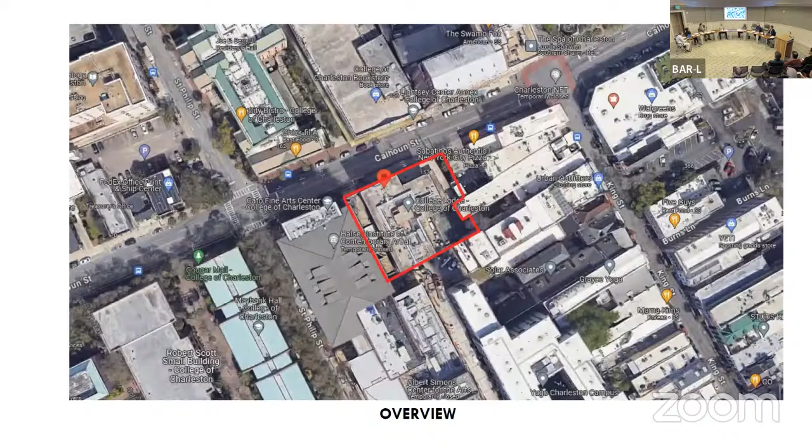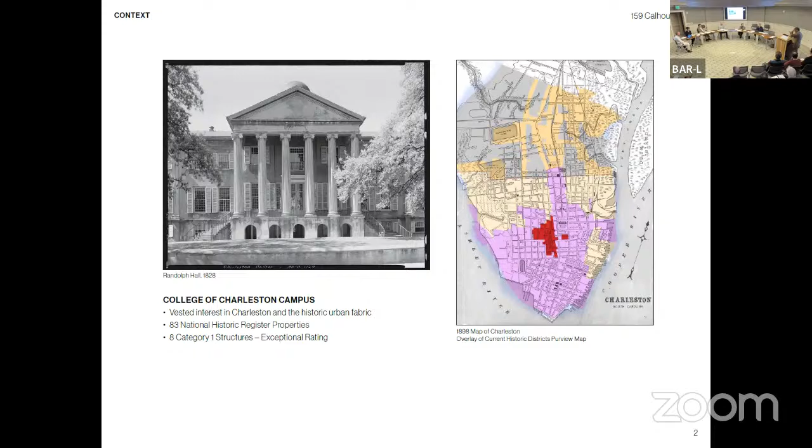My comments on today's presentation are going to run along two paths to try and structure this. First, I want to talk to y'all about the merits of the application as they relate to what is put in municipal code, prior decisions of this board, and the design principles adopted in the city's preservation plan. Then the second path, toward the end of the presentation, are the real and serious limitations of the existing structure at 159 Calhoun. Pages 3 and 4 of your packet begin to show the context and the merits of this building and why we feel we are appropriate in asking for this.

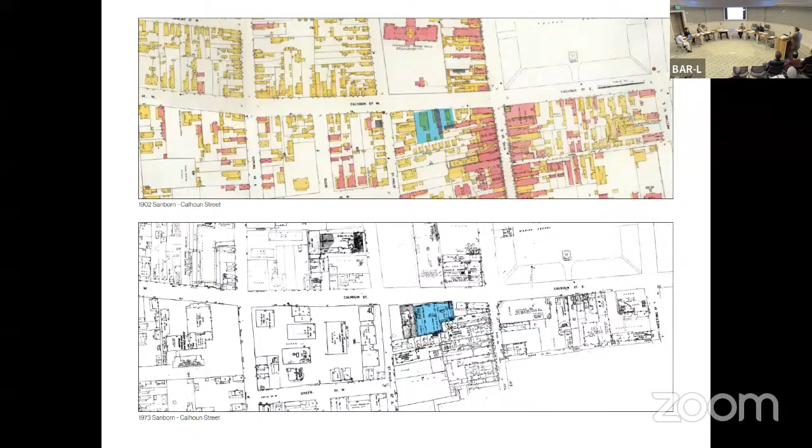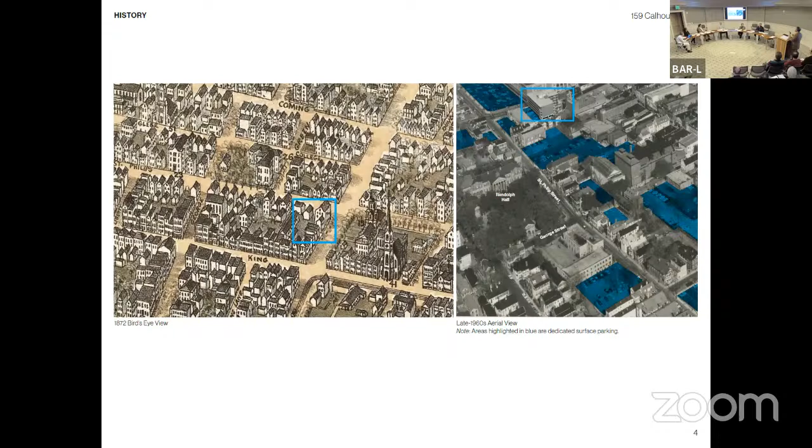I don't need to recite the language from municipal code, but as I read it, the idea is that when considering a request for demolition, the BAR should consider components like historical and architectural merit, uniqueness, is the building Charleston, conformity to the neighborhood, does the building fit in its neighborhood, is it part of its surroundings, and cultural significance—does the building represent something larger than just the building?

As you'll see on page 5, we think one of these pictures answers all of those questions yes, and one answers those questions no. The image on the left is something we view as befitting the ideals and character of Charleston. It likely should have been preserved at the time.

The image on the right, we would argue, does not have relevance to Charleston. It does not meet the stated principles of what can and cannot be demolished in the city. In our view, these images are a stark reminder of a somewhat unfortunate chapter of Charleston in which we lost architectural treasures and replaced them with buildings that have virtually no identity.

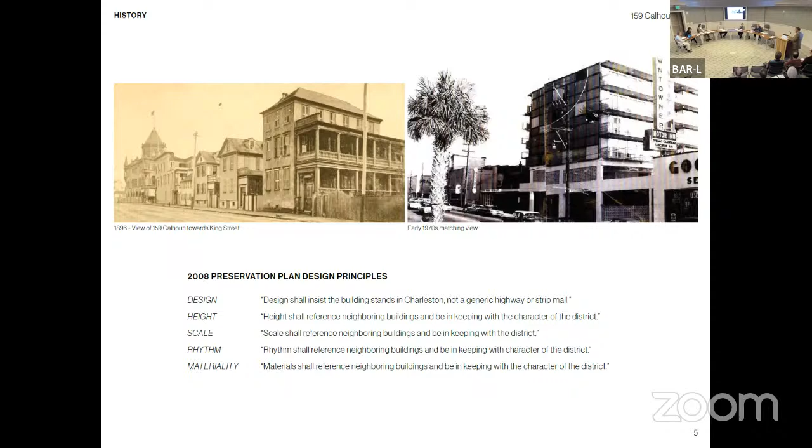Page 6 begins to show examples of virtually the same Downtowner Motor Inn in locations all across the country. The simple fact is the Downtowner was not designed or built to contribute to the rich architectural history or urban fabric of Charleston. It was designed in a way that fit Charleston no more or less than it fit Columbia, Missouri, or Amarillo, Texas.

It was built by a corporation to maximize profits. It was a pit stop or layover on the grand American road trip. It did not fit its surroundings when it was built. The building materials were mass produced, void of local craftsmanship. It was the same building built over and over in communities all across the country.

The bottom line is this building does not meet the guidelines provided for the municipal code that govern decisions related to the demolition of structures under the jurisdiction of the BAR.

This is not just our opinion here today. This position was supported by a prior decision of this very BAR in 2003, when the college brought forth an application for demolition of this very same structure. The guidelines then are the same guidelines today. The only thing different is time, but everything else was the same.

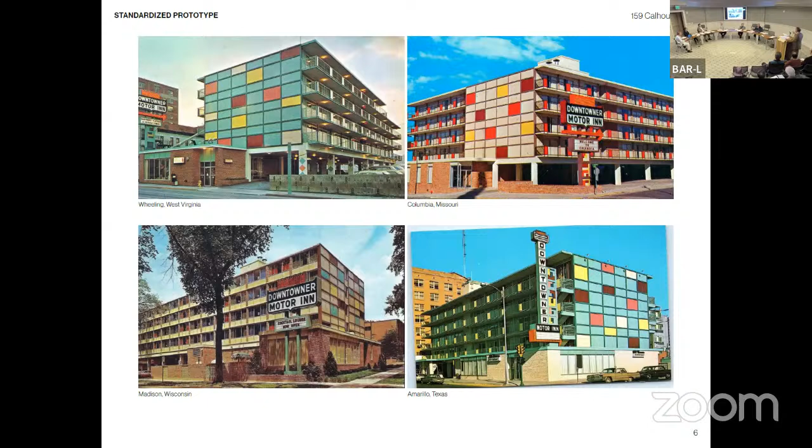Based on all of those factors, we feel our application today very much aligns with the stated guidelines governing this decision. However, if there was any question, I now want to talk about the second track I mentioned at the start of my presentation, dealing with the real and serious limitations of the existing structure. Pages 7 and 8 of your packet show the structure as it is today.

I know several of you had the opportunity to go out and do a site visit earlier this morning and see the facility for yourself. For that, I appreciate you doing that.

There was some confusion, and I want to make sure the board is aware: the facility is currently offline. I don't know if mothballed is the right word, but it is not an active use. We removed students from it following the spring '23 semester, so this past summer it was taken offline.

We did not feel that the conditions in the building were safe, both structurally and environmentally, to the point that we could continue to house students there. And we certainly had a need for more housing, but we just couldn't convince ourselves that this was an appropriate place to continue to put students.

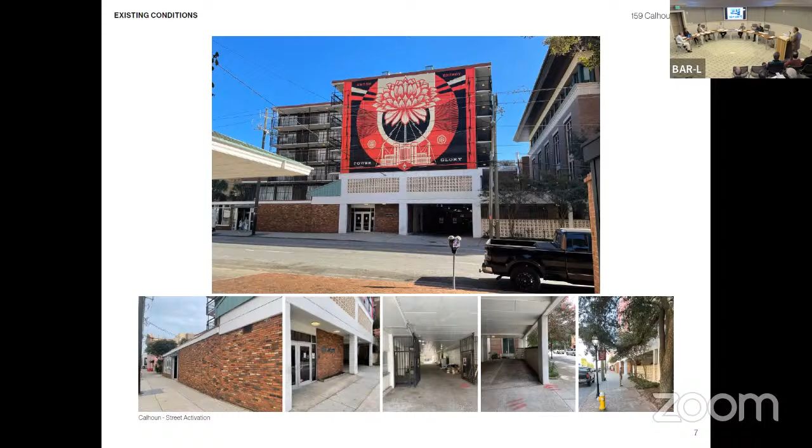Our objective is to bring back online a facility that is functional, that is safe, and that is healthy for the students of the College of Charleston. After years and years of study, I've been with the college for 10 years, and we've been talking about this building since I've been employed there.

We have brought in countless firms. Some firms we've brought in with the stated objective of preserving the building. That was the only reason they were hired. We hired the best firms in the country to do this work, to come in and help us think through an adaptive reuse of this facility. We've spent hundreds of thousands of dollars on that effort, and we've hired multiple firms. One of them's here today that did prior work on this building.

But after years of study, it is clear to us that to save the facility would require such a level of renovation and refit that we would greatly compromise the very thing that we're trying to save. The plain truth is the manner in which the structure was built in the 1960s does not lend itself to a renovation today with modern codes, technology, and equipment, and to meet the demands of students.

Obviously, those of y'all that have been in the building, it has major complications with floor to ceiling heights, the existing complications of the 7-foot ceilings, and how to fit modern and environmentally responsible MEP equipment into the existing framework were made much worse by the significant seismic upgrades that are required on the facility.

We were going through our study on this when the collapse in South Florida happened, which kind of made everybody do a new set of calculus on how do you think about buildings, how do you think about these concrete structures, what is safe, what is not. And so that was, while we were trying to march on this path, it was a major rock in the road and very much diverted how we think about these things.

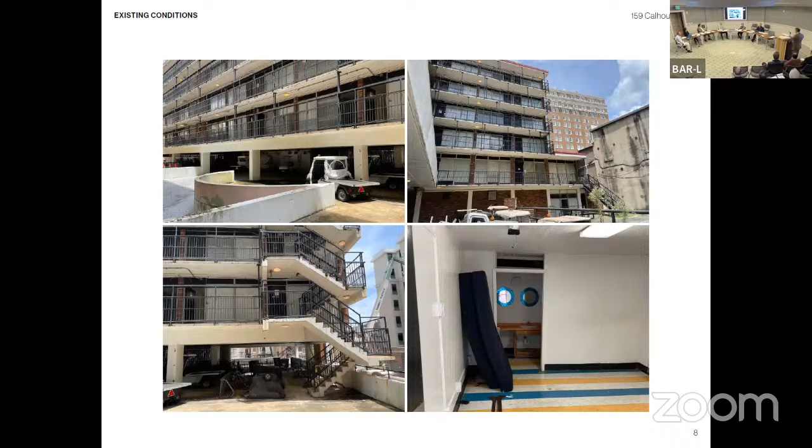The safety of our students, faculty, and staff is and always will be our first priority at the College of Charleston. Page 9 begins to show how any reuse would require essentially rebuilding the building from the inside out. The modifications consume already limited square footage in the building and make the future use greatly diminished in what we can do with it today.

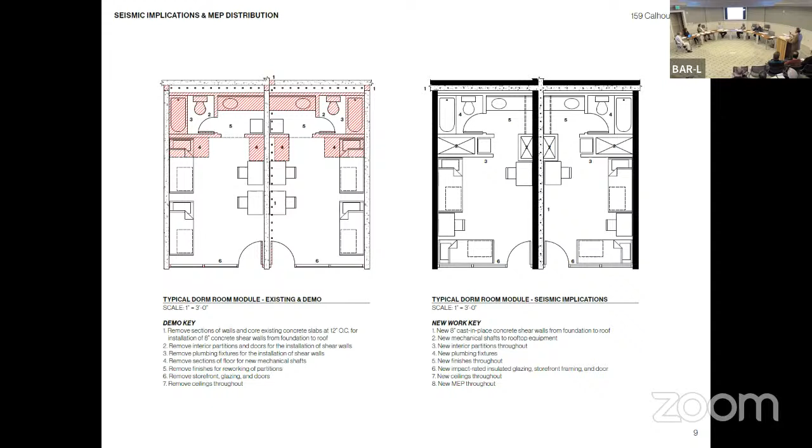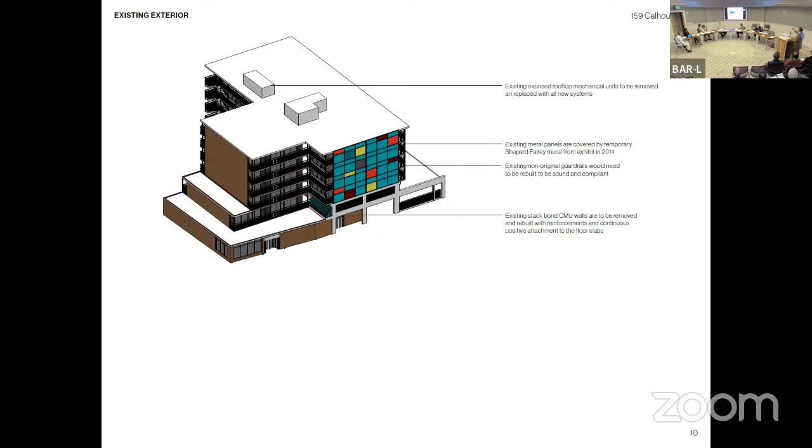As you work through the presentation, starting with slide 10, you begin to see what we've tried to do for you all is model the facility and walk through the various modifications that would be required. So this is the building as it is. And then as you go to slide 11, it will show the seismic upgrades that are required.

If you go to 12, it'll show the MEP upgrades that are required. If you go to 13, it will show the accessibility and egress modifications that will be done. And then finally on slide 14 is the sum total of what is required to be able to try and force the use of this building into the existing structure.

I think we can all agree this is not minimal work. This is a major, major project that begins to make significant changes to many of the things that are trying to be preserved. To achieve a functional, safe, and healthy building, we are effectively rebuilding the entire structure from the inside out. In our view, the merits of the structure, as you think about them within the guidelines established in municipal code, do not raise this building to this level of refit or renovation.

We recognize, and we have pained over this building. We recognize the desires and the calls for preservation. And I would submit 9 out of 10 times when we work on buildings at the College of Charleston, we save the building and continue to use it. But in this case, we cannot get there as an institution. In this case, we find a highly nuanced situation in which the preservation and the ideals of preservation are in tension with building code and the pursuit of a safe and healthy building for the College of Charleston.

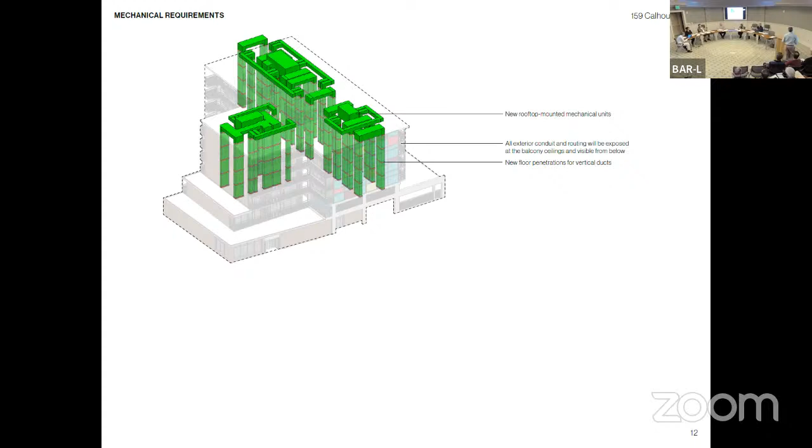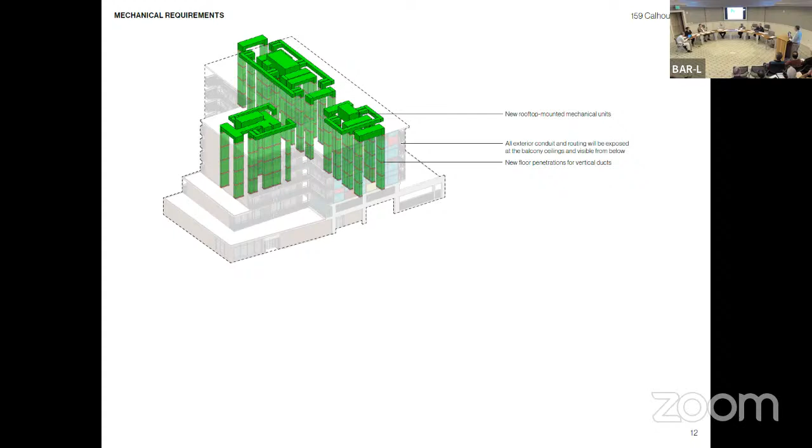So I think I know a little bit about this project, because in 2003 my firm did a major renovation design of this building that included a demolition submittal, done after we submitted our renovation project. Because of costs at that point, it was determined whether they were going to spend that kind of money to renovate the building. There was a requirement at that point from the state engineer to do seismic upfits, and the college decided it might be in their best interest to replace it instead.

We've also done a 2013 study with ADC that looked at many of the seismic issues. We've done life safety repairs to the existing railings you were talking about, some of which were existing, but because of concerns by the college with student safety, due to the openings and sizes of those, we augmented those exterior rails with new steel railing. We replaced existing electrical panels that were known fire hazards.

So I know a lot about this building, doing, I don't know, over the course of 30 years, it feels like a lot of projects. I am here to say that I feel this building has a very, very restrictive context for a renovation. And even if it were to be renovated, by the time you look at what has to be done, mainly for seismic and for HVAC, the rooms literally will not meet standards that students expect.

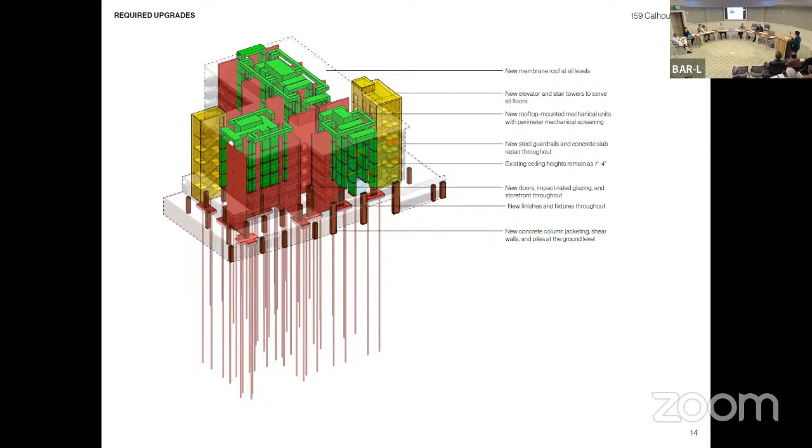energy would be expansively more than perhaps the embodied energy that would result from a renovation of this structure. And finally, I believe that while Charleston is full of amazing examples of 18th and 19th century buildings, we have few and far between examples of Charleston's modernist history. And so I think that the modern architecture in Charleston is equally deserving of our care and our resources as well.

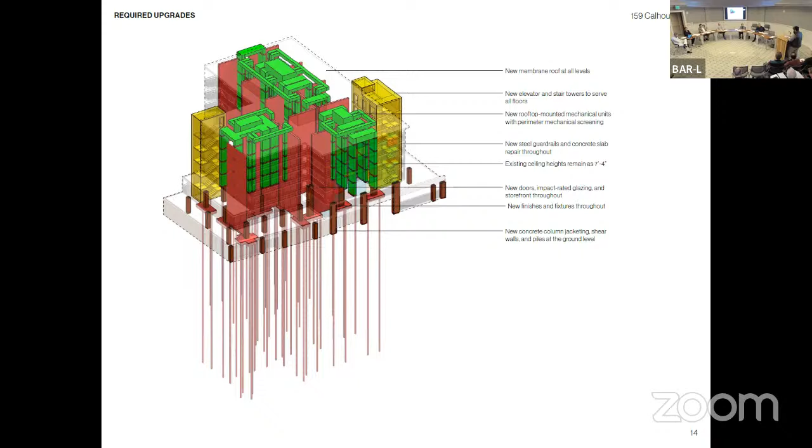Preserving this building will be a challenging project, but we're hopeful that with the long history of the college's stewardship of historic properties, it will keep College Lodge as another resource in their incredible inventory of historic buildings that makes College of Charleston a world-class campus, and save another important part of Charleston's mid-century architectural landscape. We recommend denial of the application of 159 Calhoun.

Thank you, Mr. Schwebler. Additional members of the public wishing to be heard on this agenda? Seeing none, city staff comments or recommendations?

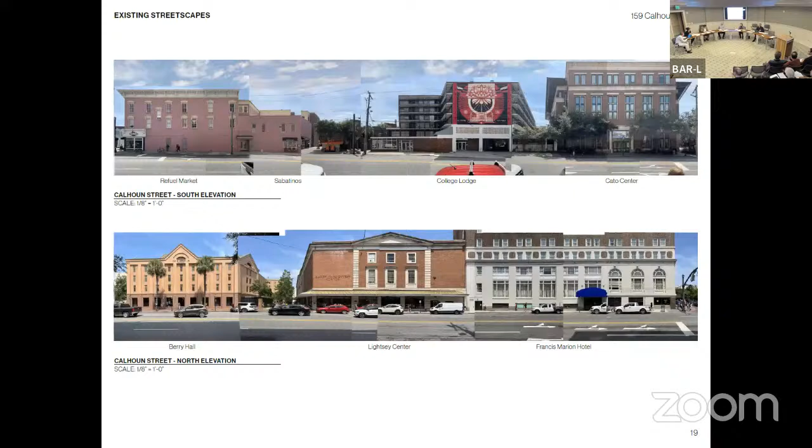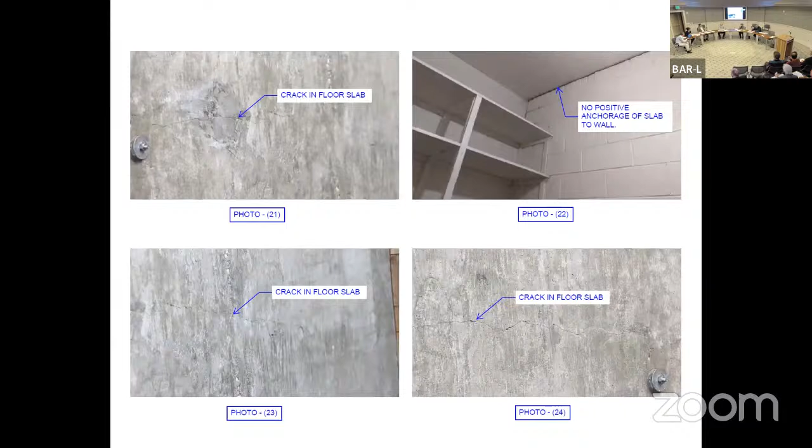Okay, I'm going to provide you with a little bit of staff context. I want to remind you that the purposes of our historic districts are advanced through the preservation and protection of old historic or architecturally worthy structures in neighborhoods, which in part impart a distinct aspect to the city and which serve as visual reminders of the historical and cultural heritage of the city, the state, and the nation. So I think the question you've got to consider here tonight is whether this is a worthy visual reminder. A decision on this demolition request is not about personal preferences or future use, but whether the application meets the criteria for demolition.

Referring back to the ordinance, I always like to do this. The ordinance gives us some criteria to consider, but it does say we should consider these among other things: the historic, architectural, and aesthetic features of the structure, the nature and character of the surrounding area, the historic or culturally important use of such structure, and its importance to the city.

All right, so in staff comments, we're weighing these considerations, and I think that you'll find that the span of these comments represents the span of some of the public comment. Number one, this is one of the few mid-century structures remaining in downtown.

The 2007 Preservation Plan for Charleston, Vision Community Heritage, describes the time of the downtowner's construction as a time when the prosperity of the post-war period was restored, but came at the expense of the inner city as suburban development began to decentralize Charleston, a city that had been for its entire history a compact urban settlement confined to a small peninsula. I share that so you know what was occurring in the built environment during that time.

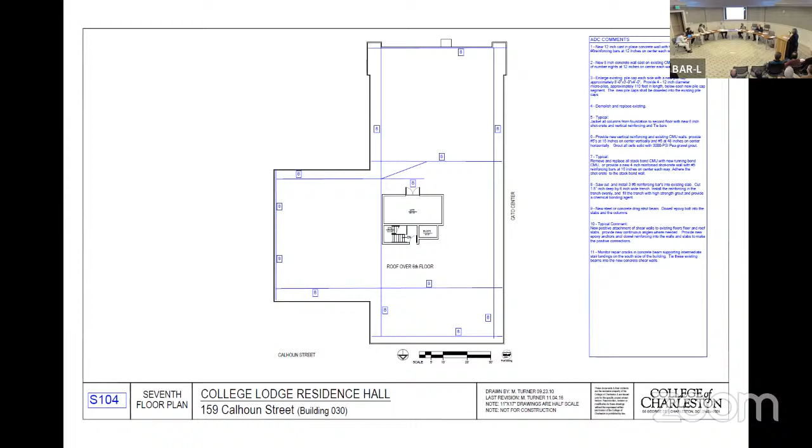I also wanted to say, I understand you need more illustrations showing the impact of these seismic upgrades. But if we flip back to the structural report, which I think you have, and the floor plan, the dimensions on the exterior of the building will be impacted. Part of what is unique about this building—if you keep going, there you go.

Let's start with the ground floor. On the ground floor we have several columns, and each of those columns is pretty important in mid-century architecture. I'm not sure, but they're about 16 inches, maybe 16 by 8, and they will require a 6-inch concrete jacket around them, which will really change the proportions of this building. Same with the walls where you see the red lines.

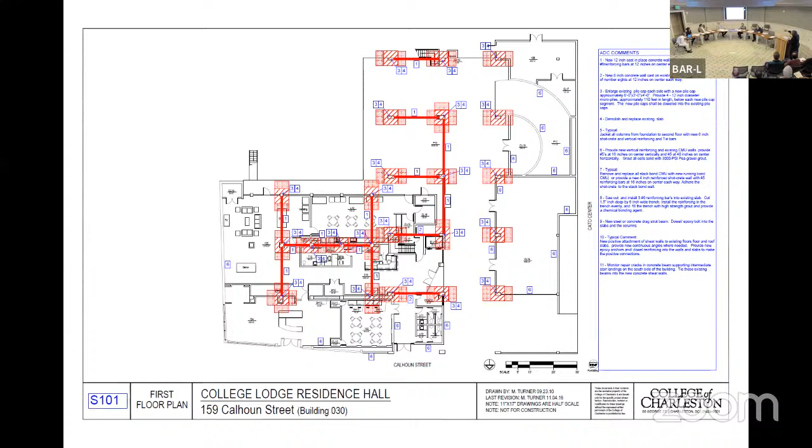If you go up to the next floor plan, on the upper floors, each place where you see those lines, we will be required to add 8 additional inches of poured-in-place concrete. So when you go to the elevation, that will change the proportion of this design. It will cause an impact.

And then the other thing, the mechanical, we will have a significant amount of mechanical up on the roof, which will then require screening. So what is now these nice slick horizontal lines and real thin verticals, that will change. We feel that a lot of the architectural integrity we are trying to preserve will be impacted. So I did want to put that in there. I respect needing to see this drawn out, but there will be impacts.

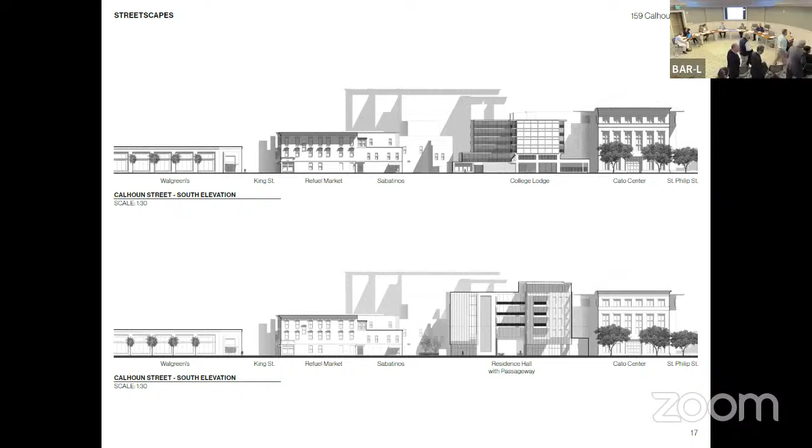I think the presentation is very thorough. They're just, it's obvious, they're trying to reconcile. Right, and I think information will change over time. Decision, you want to have every card on the table. That's right.

Well, I fully believe them when they say if we do what we're proposing to do, there's going to be significant exterior changes. Well, would you say that? Yes, actually personally, very. Well, I think that's because there've just been so many losses in the past, people are more sensitive to what remains.

I have a good friend who's got her master's in preservation and she does great work, and her passion was really for Art Deco, streamlined modern buildings, the few that we have in Charleston. And when you go back and look at the records, there weren't that many built before. I don't think we have any at all.

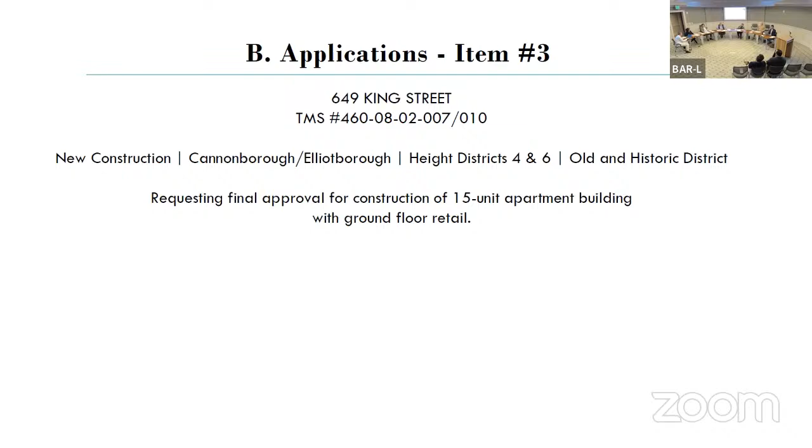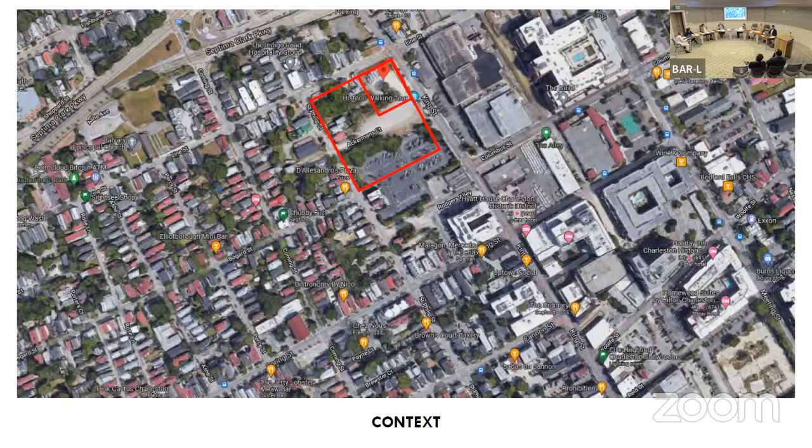Agenda item number 3, 649 King Street. 649 King Street is new construction, in the Cannonborough-Elliotborough Height Districts 4 and 6, and the Old and Historic District. This one is for final approval for construction of a 15-unit apartment building with ground floor retail. Context slides, please - Courier Square 2 occupies the larger box, and this particular building is building 2, the smaller box. These are existing site photos.

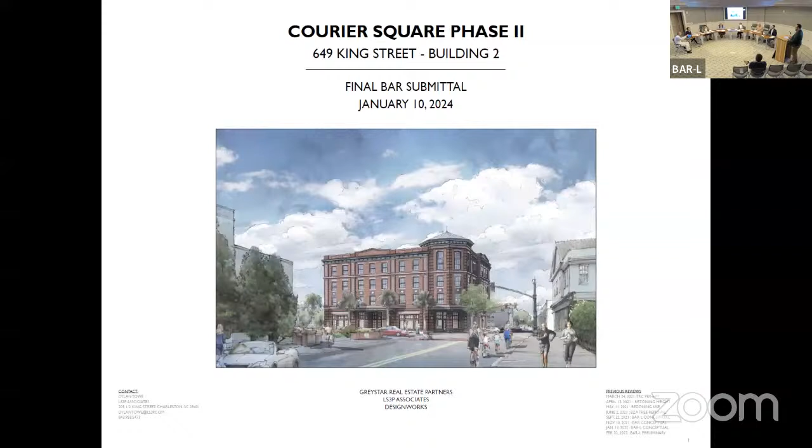I've got a few members from my team as well as the owner and Greystar here. Appreciate the board's time. I hope what you'll see here is really a continuation of refinement of the design and the details of the approval we got back in February of this project. So want to move to the next slide. Oh perfect, clicker. Awesome.

So just quickly going back to some of the comments that we got back in February, and I'll address how we've adjusted or modified the designs based upon those comments going forward on the particular elevations. The real comments we highlighted were studying some refinement to the columns on the west side of the building that felt like they didn't really relate to the design as it was then. And also to look at thinning up and making a little bit more intricate the canopy design, which is around 3 sides of the buildings at that point. And then some questions about GFRC and FRP, which we're not getting into unless you have questions.

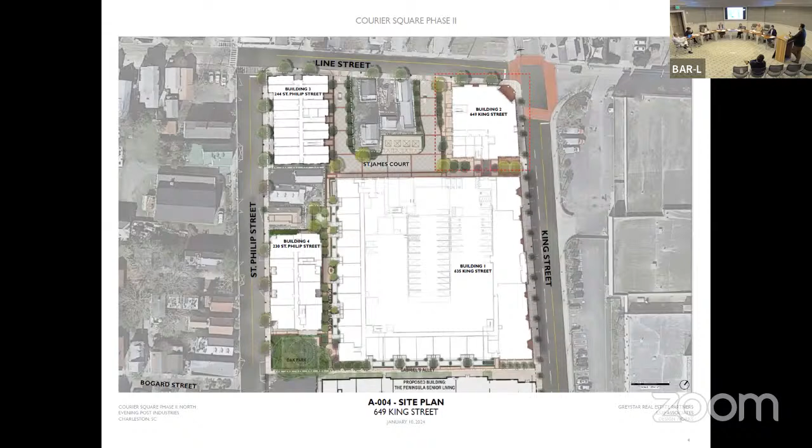So moving on, as Tori mentioned, our particular project here is 649 King on the corner of King and Line Street. The other 3 buildings you've seen in the past have come before the board previously. I'll quickly go through the ground floor plan here again - no substantial changes to what you guys have seen last time. For this time, it's really again just refining the design as we work through the details, both with the contracting team and with particular vendors as we refine this.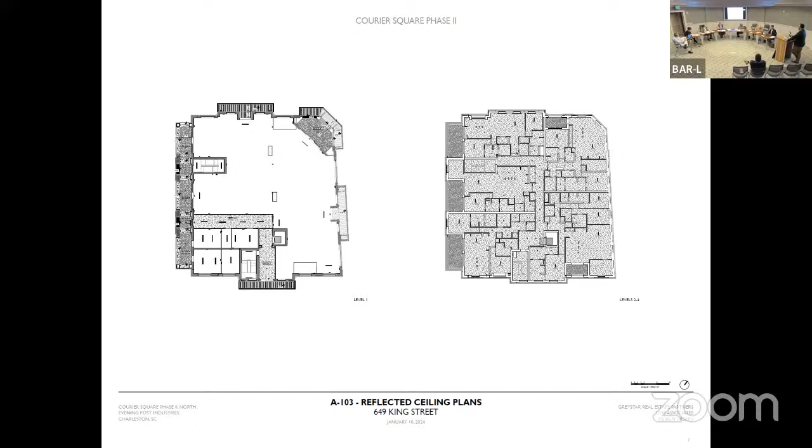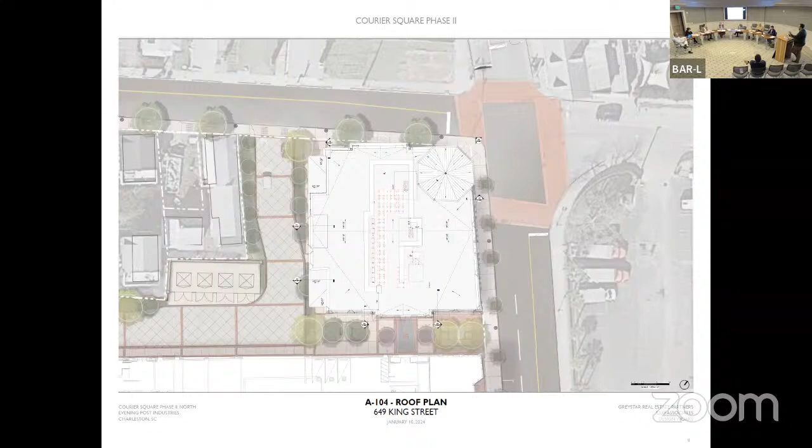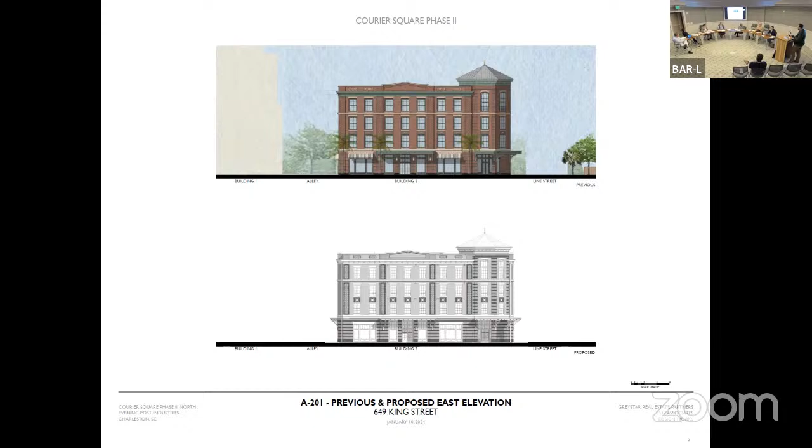I'll go through some of those design elements in large detail as we go forward. So this is the east facade facing King Street. As I mentioned, the canopy here reflects all three canopies on the building, which are basically the main retail entry points or potential retail entry points. Previously, that canopy was about 28 inches deep. It's now 18 inches deep, and 18 inches thick, and it protrudes about 5 feet from the face of the building.

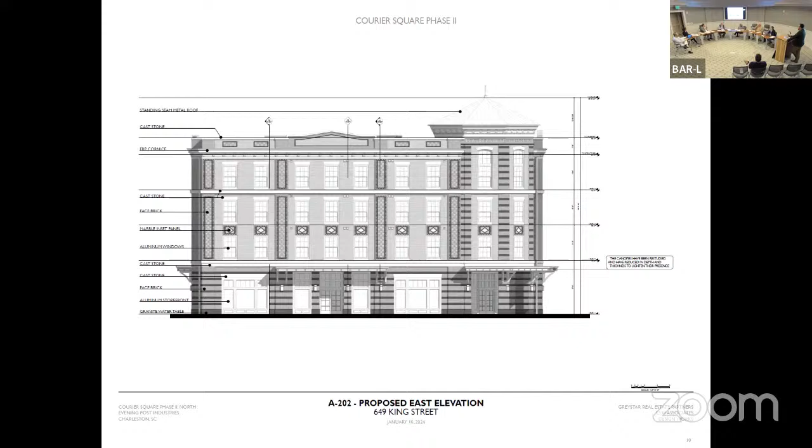The other thing we've done with that canopy is actually slide it below that cast stone band. We really felt like before it was in an awkward spot, halfway between the two, and you couldn't really see a cast stone band continue around the building. We felt like thinning it up and moving it down made more sense for the overall design, which you see reflected here.

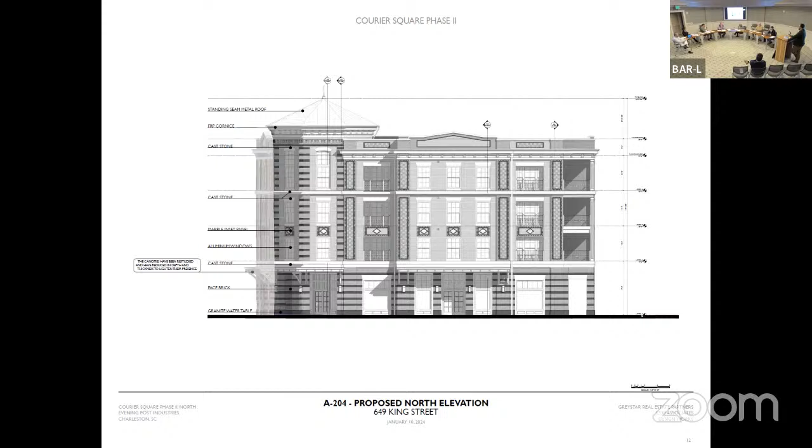But here's that elevation again enlarged. I can talk about some of the materials - I have material samples. Last time at preliminary we did not have those here, so we brought those for the benefit of the board to see what those look like now. We've got a granite base, two different colors of reddish brick interwoven on the facade, and then a black brick which you'll see as accents. We've got some FRP, metal panel, and stone, and then some colors associated for trim in there.

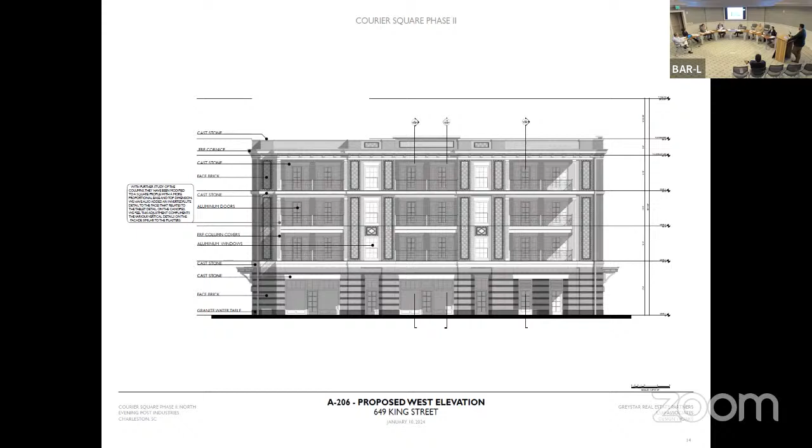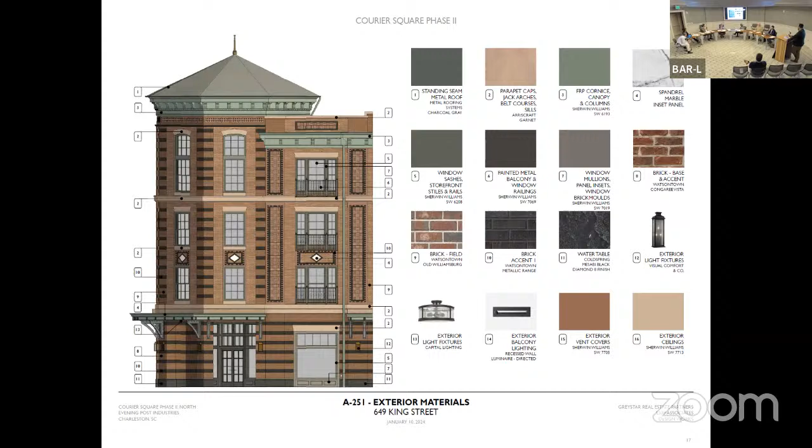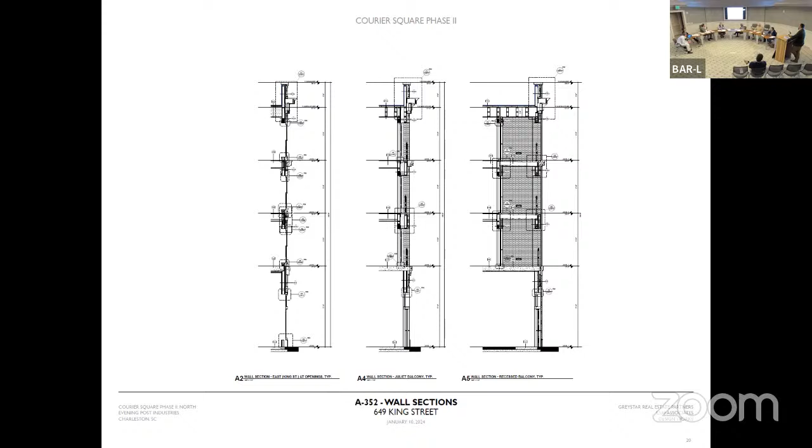You want us to try it? Oh, there you go. And I've got things... Okay.

Okay, all right, this is our first set of enlarged elevations and enlarged sections. I just wanted to point out a couple of these.

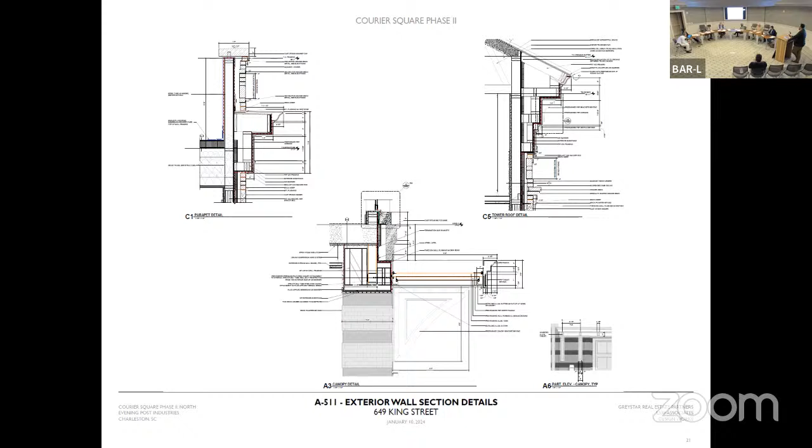The details on the right are really representative of some of these balcony edge conditions, where we've got the cast stone bands coming across. It was a challenge for us to figure out how those worked as they go in front of the balconies, because we're ruling them to be continuous as they go around the building. But we think what you'll see here reflects keeping that same design.

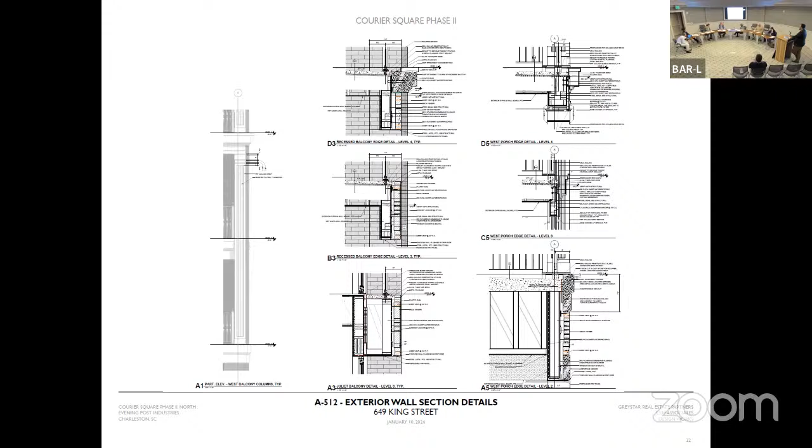Same thing with the FRP fascias on those. We've really done a lot of work to make sure that those maintain their location, being continuous around the facade and not really being affected by the balcony interruptions.

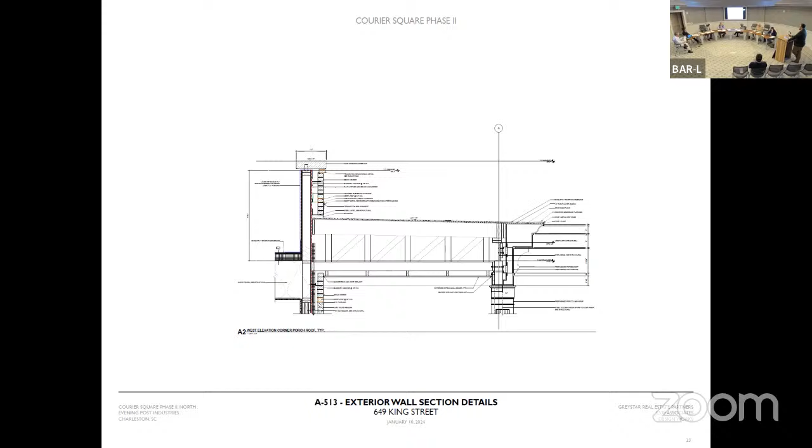This is the top of those balconies facing the west side. So again, the FRP cornice that continues around the rest of the building also continues here and then sits upon those FRP column wraps on the western facade.

Here's where I really want to make sure you guys understood the amount of detail in this brickwork. Our team spent a lot of time going through this, making sure it coursed out with the modular brick that we selected, which you see below.

A lot of these you can see, and this is representative of the typical pilasters on King Street, on Line Street, really on all four facades. It may not have been apparent on the last drawing set of preliminary, but you can see all those header courses that are stacked in there.

We've got a lot of recesses back and forth in there, so you get lots of play on the light and the texture of the brick between the basket weave pattern and the stacked brick, which I think really contribute to the design of the building.

The base is a little simpler. It's just horizontal banding that's recessed half an inch, with that black brick interwoven in between, but it all ties up the building as it goes.

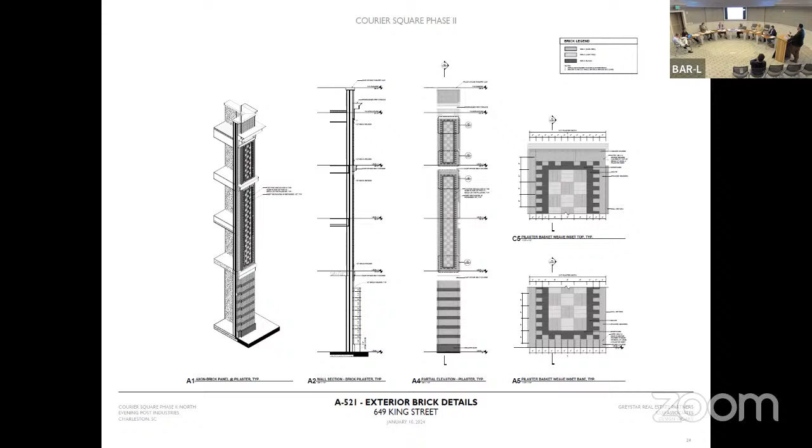These are the inset panels at the tops I had mentioned previously. So we've got two different motifs here, over the main retail entries.

We've got the canopies. We kept a running bond of brick in there for potential signage at some point, or just simplified. The rest of them have the basket weave you see on the bottom three images, and those occur over windows on the facades.

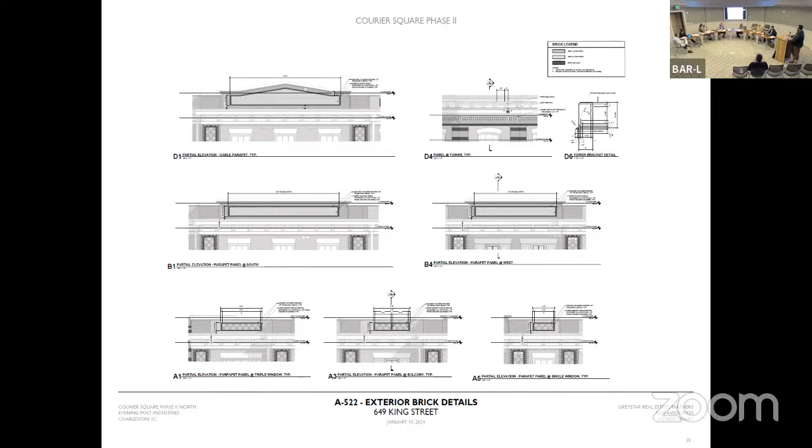The one that's, I think, the most unique is actually on the top right. That exists only on the corner tower - if Morris can zoom in on it, it's kind of a modified basket weave in there. You guys can see it if you want, but I wouldn't mess with that computer too much.

It's cranky. This is the other portions - I'll call these the brick spandrel panels that occur basically at the 3rd floor line. These again have a marble inlay in the center surrounded with a black brick banding, along with some of the lighter and darker bricks you can see there.

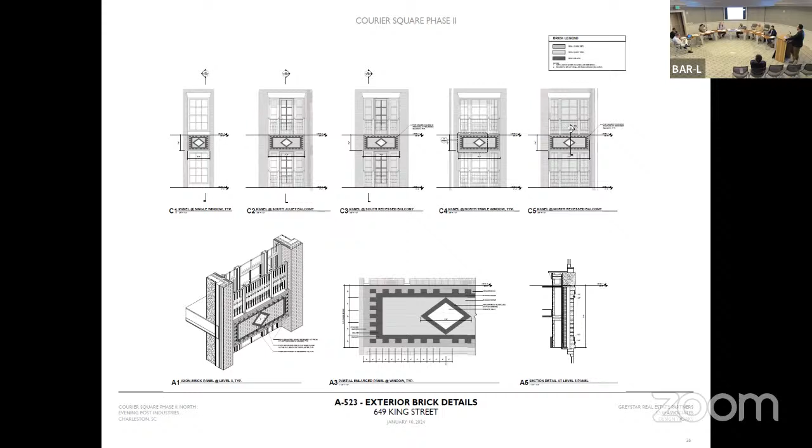Again, it references some of the same details that occur on the pilasters, just in a different pattern. We'll get through our window schedule unless you guys really care a lot about that.

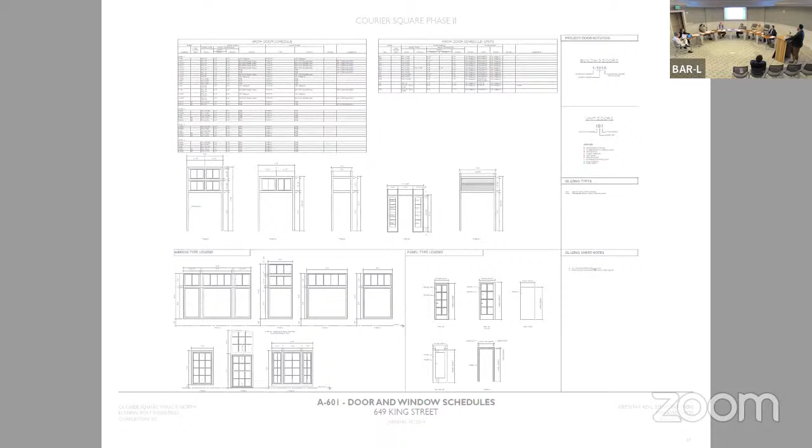And then these, again, these are more of our standard uses. The one thing I did want to point out is our windows are set back a little over 6 inches from the face of brick, so we did try to set those back as far as possible. We'll look to work through some shop drawings as far as where that occurs, but we don't see any reason why they should need to move any further out from that.

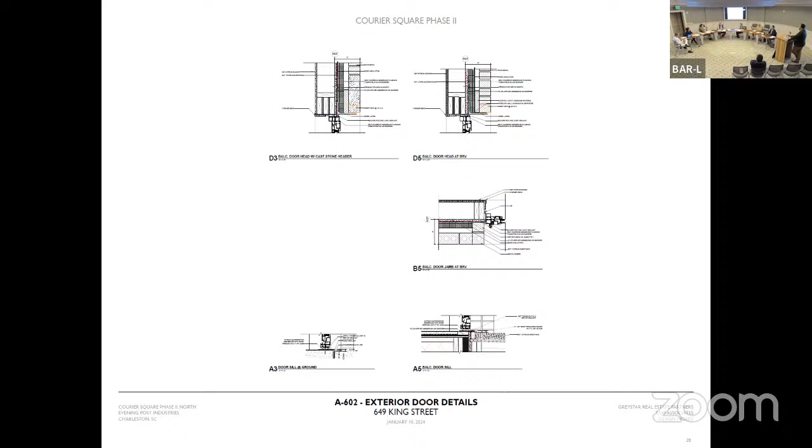And then again, some of the same details for the upper floors, just we have double stud and wood stud, and keeping the same plane.

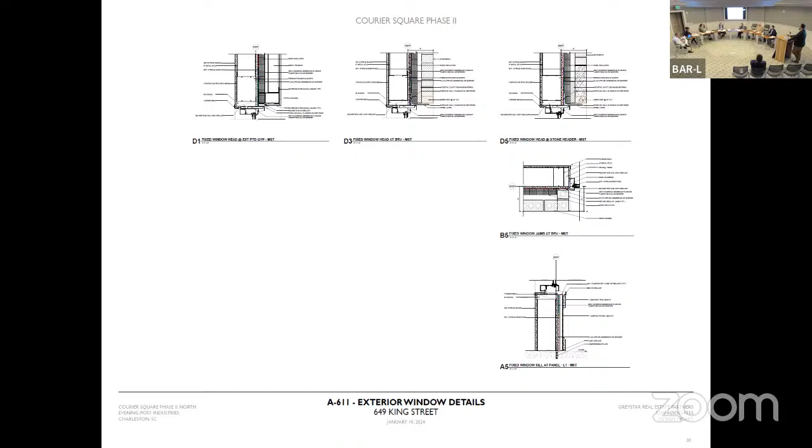Yeah, so I know, this is something we'll get reviewed at the staff level, but we'll start to show an idea of what that mock-up panel may be, making sure we captured all the materials on here, just from the standpoint of getting all the details worked out ahead of time.

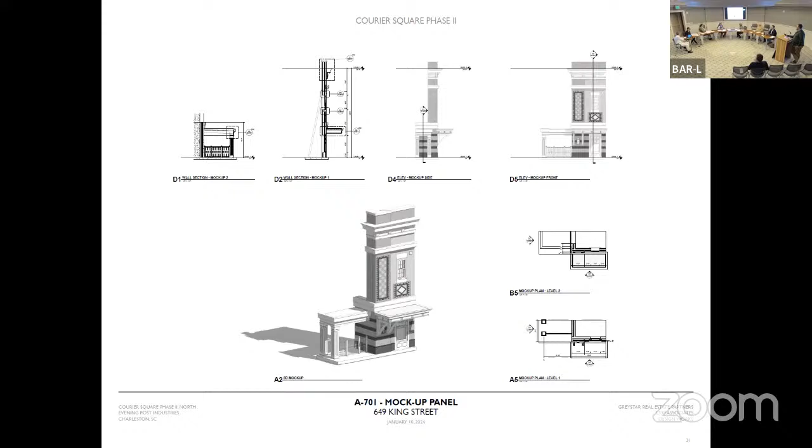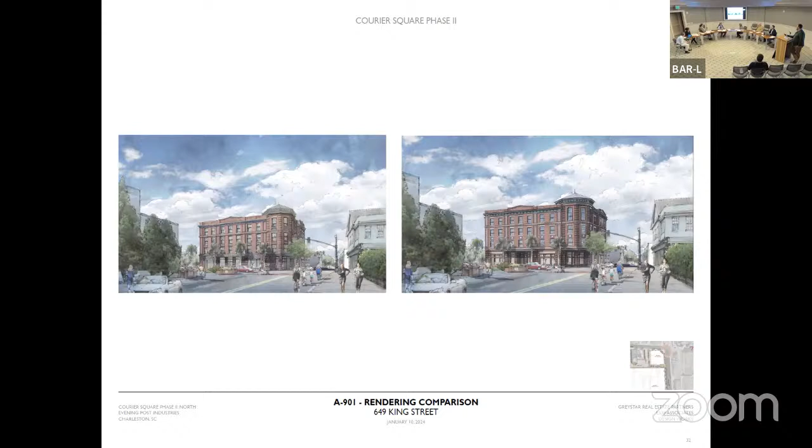Are there any questions for the applicant? No. Seeing none, it's time to have a seat. Any member of the public wishing to be heard on this agenda item? None? Ms. Parrish, staff comments and recommendations?

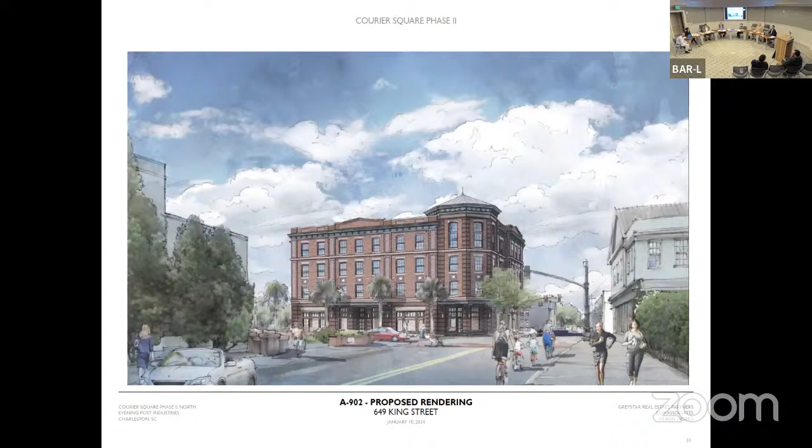I'll share a few observations first. The building has changed very little in its fundamental arrangement of major components and massing, and continues to fit well in its context. Detailing has evolved well since the preliminary review, with a great deal of richness and visual interest to the use of multiple brick colors mixed with other materials.

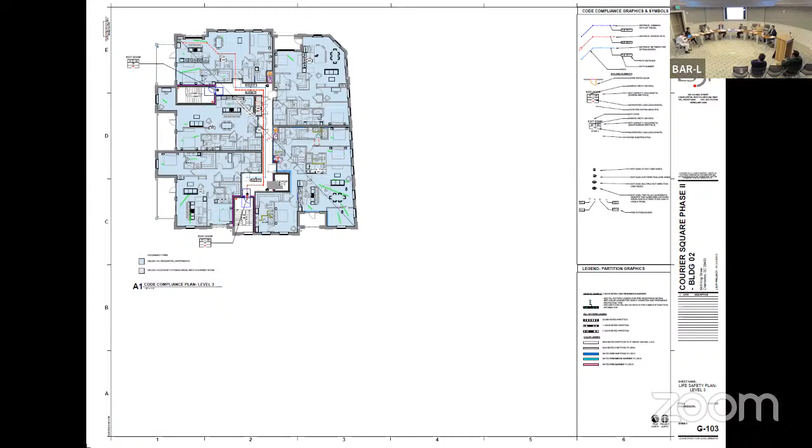Materials should be explicitly reviewed and approved at this time by the board. Staff verifies that the application meets the minimum requirements, and additional drawings have been provided to staff and board members for reference. Staff is satisfied that the applicant has addressed previous staff and board comments.

A complete signage package has not been included in this or previous submittals, but as it is largely residential, main building and tenant signage should be minimal and relatively easy to handle at staff level. And also, it is expected, and you've been previewed, that there's a comprehensive mock-up drawings package that will be submitted at the appropriate time.

Staff conditions if approved. Number one, and I'm not sure why they're not on the screen, but I can't say I'm surprised either.

We have lost the YouTube feed. There's a public presentation. I will just say that the staff comments have been distributed to the board members. I'm going to start reading them.

While in pure elevation, the corner turret roof appears to be well proportioned. Foreshortening at grade level can make this element appear squatty, as on Courier Square Phase 1, and as shown on the renderings on pages 32 and 33. Staff suggests consideration for a restudy of the pitch on this roof to ensure it achieves the desired effect.

When viewed from a little closer to the building at ground level. Number two, much appreciated the recessed windows. We do have a comment about that on detail B5, sheet 29, and that's where the window frame setback is shown even as aligned with the back corner of brick at the jamb, with little solid behind the backer rod and sealant.

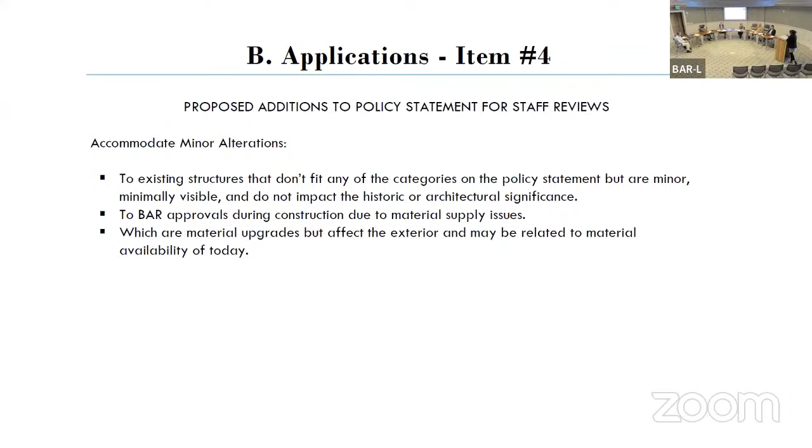And so thinking about minor alterations, there's actually a lot of things that could fall into this. So let me give you some examples.

Let's see, I'll go in order. A lot of times with existing structures, especially at BARS and also at BARL, we have alterations that are minimally visible, minor to the scale of the project, and are not going to impact any historic or architectural significance that we would love to just take and review and have the authority to do that.

We also have seen a lot of material supply chain issues with the larger projects that you see. Recently we talked about a color of tile that was approved in a mock-up that was changed. So I would love to have the authority to capture some of those changes, and I'll tell you how we'll do that. And then we sometimes have projects that get requests for material upgrades, and they technically change the exterior of the building and the appearance, but who would say no to, say, asphalt shingles to a copper roof? So we'd love to have the authority to do that if we feel like that upgrade is appropriate.